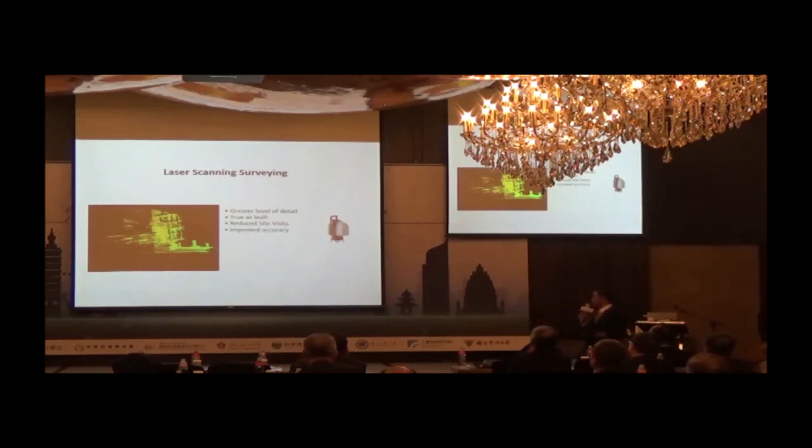But if we use 3D laser scanning survey, what is the benefit? Greater level of detail, true as built, reduced site visits, improved accuracy, immediate results, 3D visualization, and of course it's dimensionable.

And now, per second, we can get up to 75,000 points, compared with the old method where for 1 point we needed 5 seconds. Much faster.

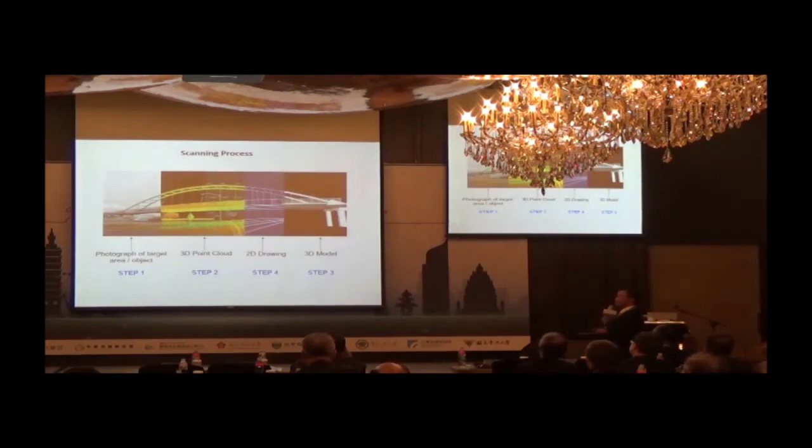The scanning process is very simple. First we take the original photograph, then we record the surface data into a 3D point cloud, process it into a 3-dimensional model, and then submit to the client whatever requirements they need in 2 dimensions.

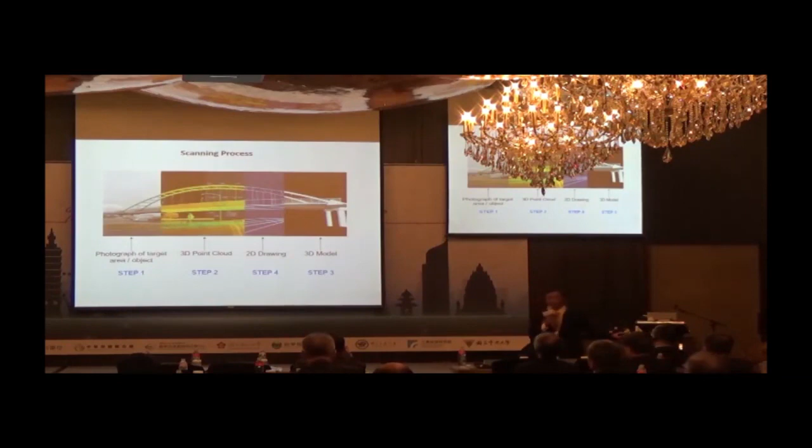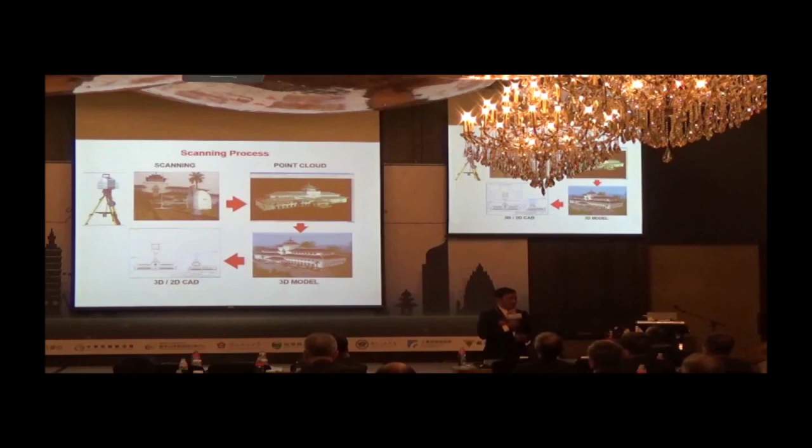Very simple process - same thing in another language. First the original, then we produce the point cloud, make the model, and convert it to AutoCAD, translating into civil engineering or architectural engineering languages, like this.

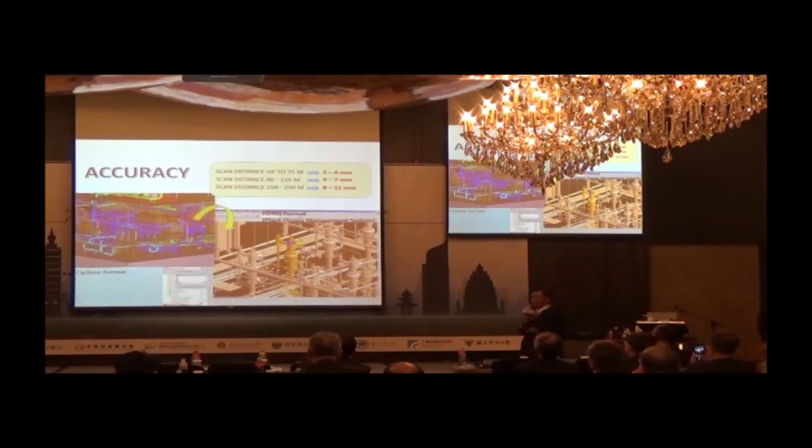What about accuracy? We checked in piping measurement at an oil company. If the object is up to 75 meters from the laser scanning position, we can get accuracy of 2 to 4 millimeters - repeat, millimeters, not centimeters. And so on.

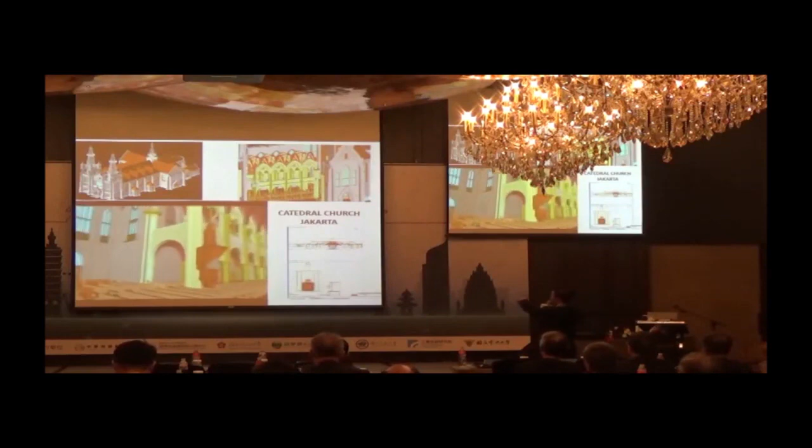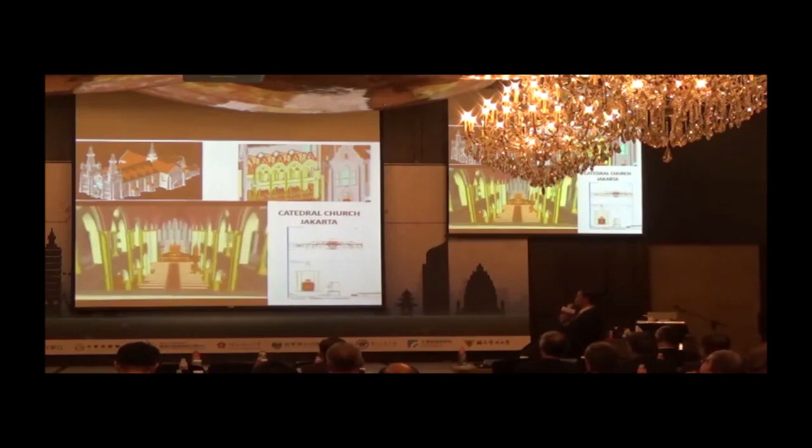And of course, on the right side, this is the civil engineering drawing technique - very detailed, even the architectural detail, and that is from outside, like this.

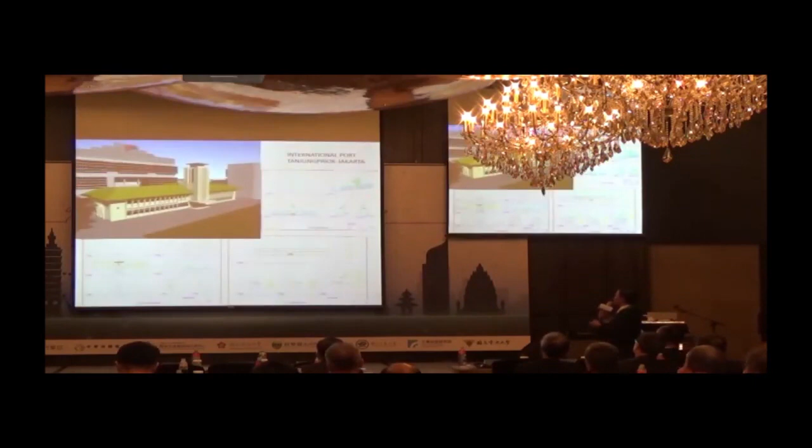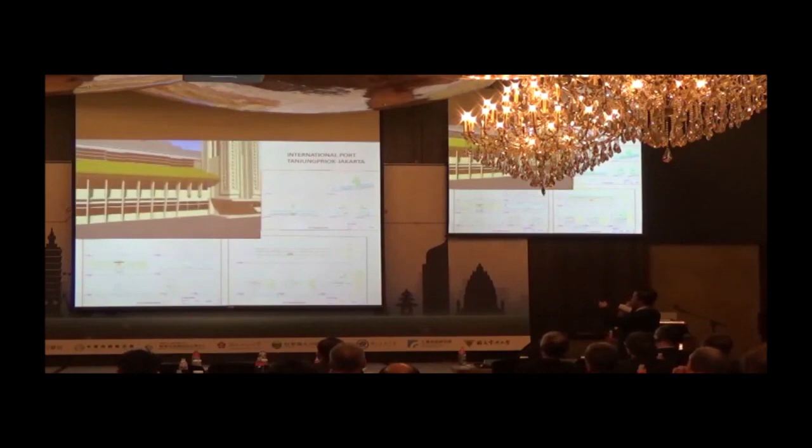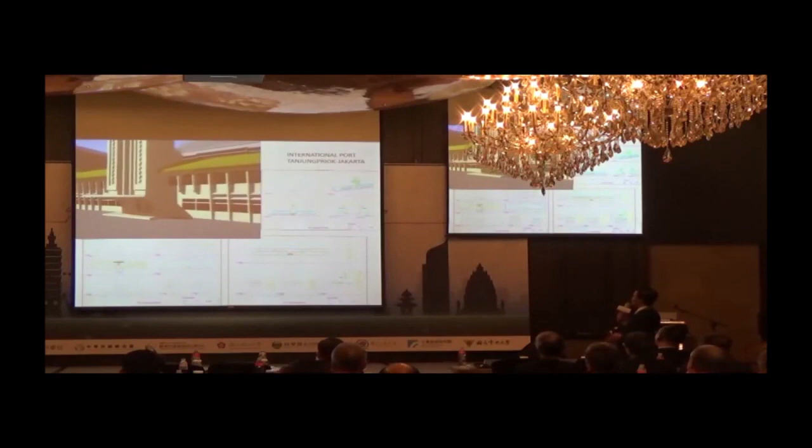This is international port of Tanjung Priok, Jakarta. You can see, I'm sorry it's not too clear, but I hope you can see the final product. We can see the front side, upside, and so on.

Even floor by floor, we can describe this - this is the first floor, a much better documentation. The next floor, and even the tower, like this.

And this is Yogyakarta Sultan Palace in the Java Island, with traditional music. This is Yogyakarta Sultan Palace.

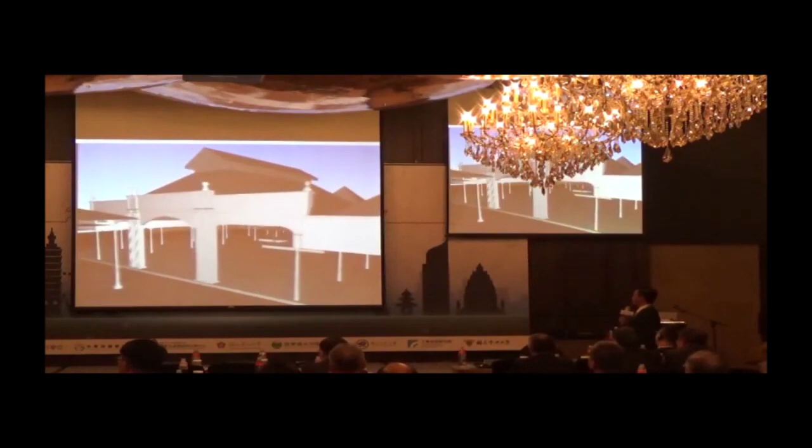We have documentation - if something happened, like a fire or something happened to this place, we have documentation like this. The symbol of this one.

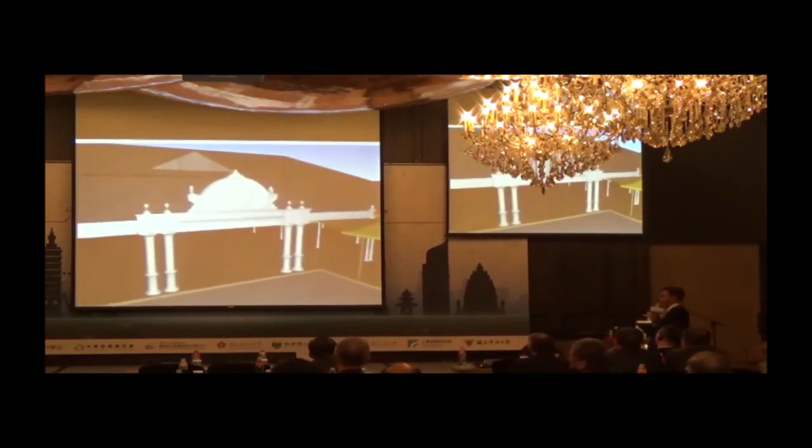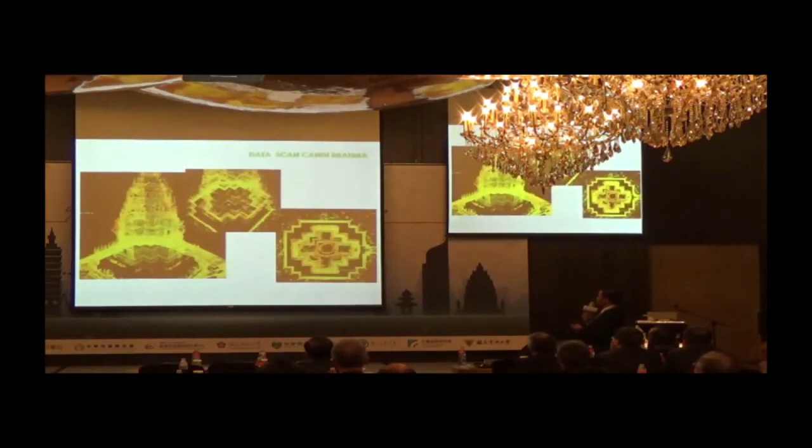This is Prambanan Temple - we have done the 3D laser scanning, and this is the result. Prambanan Temple, Candi Sewu. We can even do horizontal deformation analysis for this temple.

Now this is not vertical anymore - it has some minus degree, like this.

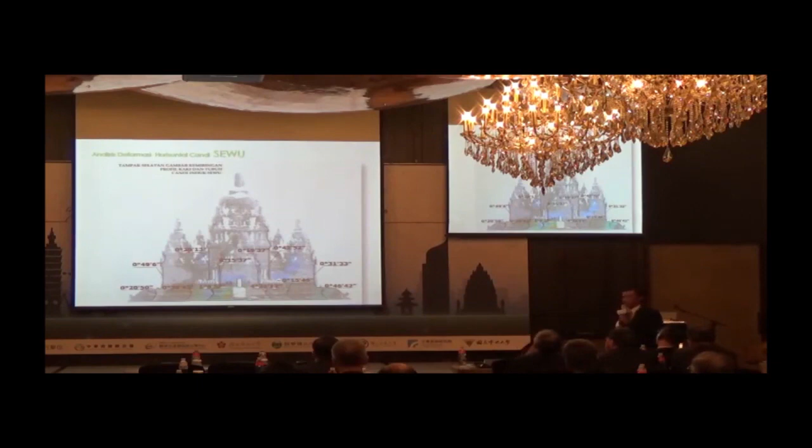Even in this temple, you can see the bridge, the brick - the damaged brick can be monitored here. And we can show the cross section.

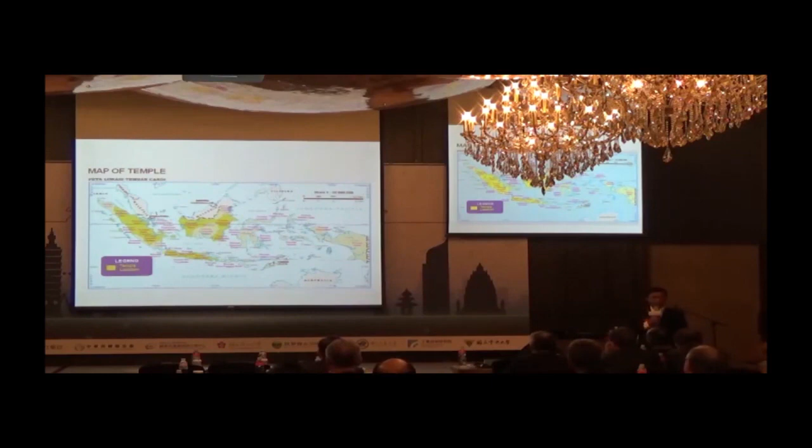We still have more homework in Indonesia. The yellow one is the condition of our temples in Indonesia - so many temples over there. This is our homework - in Sumatra, so many temples on the list.

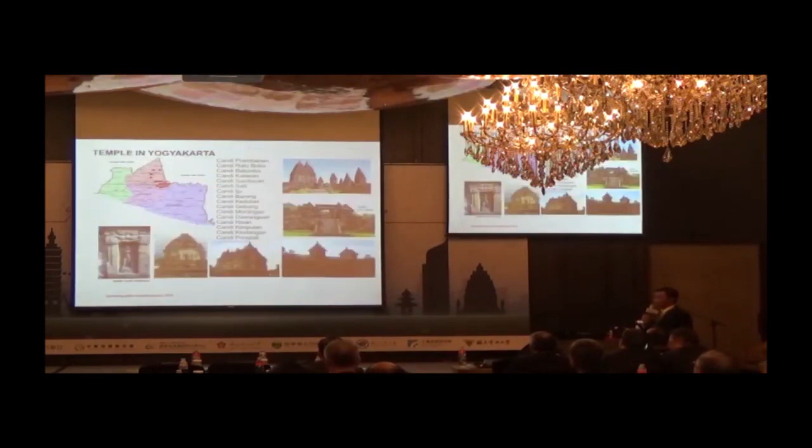West Java, central Java, Yogyakarta, East Java, even in Bali.

So the conclusion is: in the past, we were blind. We had no data, we had no documentation. But now, we have the technology.

But we have limitations: human resources, equipment resources, and of course, importantly, financial resources.

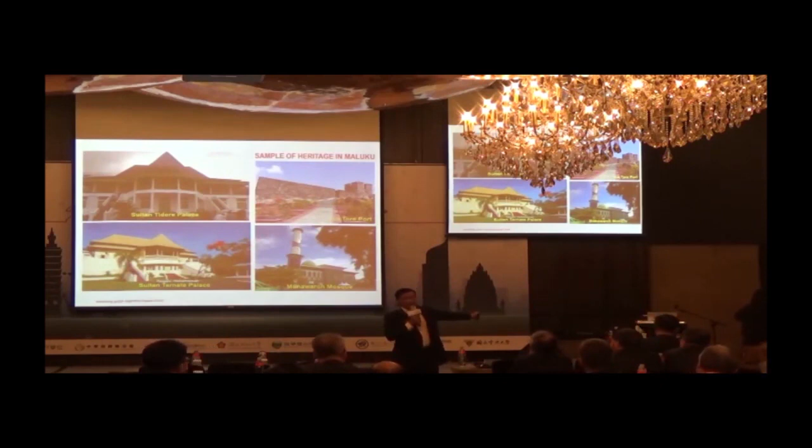We hope our dear friends in Taiwan would like to support us to save our heritage. So that in the past we were blind, but in the future we are not blind anymore - like the song says, 'was blind, but now I see.'